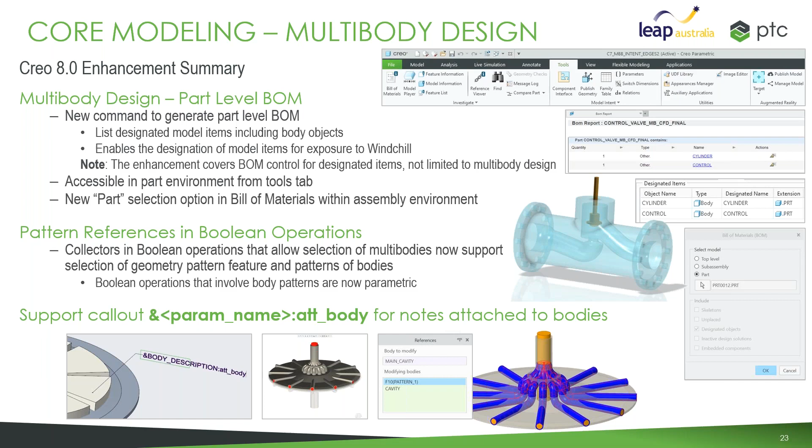Last one is around support callouts. So if you have some defined annotations, if you're doing MBD related stuff, or you want to put them in the model to use with the drawing, we can now create these callouts that can call parameters that are defined inside the body for your notes.

Sheet metal. I know there's plenty of you who do a lot of sheet metal stuff. So again, there have been lots of things through the Creo releases. In Creo 8, there's a few nice little things there. So there's now the multi-flat wall feature. So I can just go and pick as many references as I like as I build that flat wall. So it'll automatically handle inner and outer corner definition, miter, do the cuts, whatever else I want.

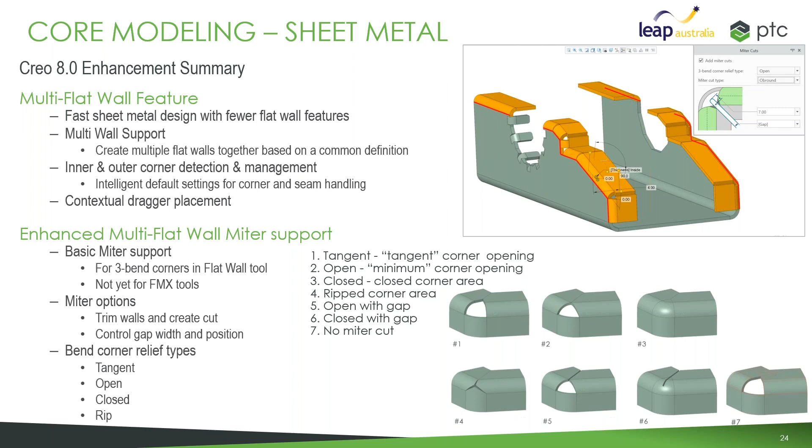In terms of that mitering, I've got a whole bunch of options I can see here on the screen in terms of how I handle that geometry, what I want to do in terms of the corner, miter cuts and the like. We'll have a look at this in the demonstration. And a few other bits around other things like corner detection, handling bend relief for your flushed hems. Lightweight hole support is there inside sheet metal. The multi-hole is there inside sheet metal as well.

The last one there, because I know a lot of customers used this when it was introduced back in, I think, Creo 4, the flat simplified representation for your flat instance. So the ability to automatically create that as a simplified rep rather than as an instance, which would then be something else you might need to manage in Windchill. So you've now got a configuration option where you can define the default name for that flat simplified rep. So if you have a particular convention that you use, you can define that in your config and have your flat pattern reps automatically use that naming convention.

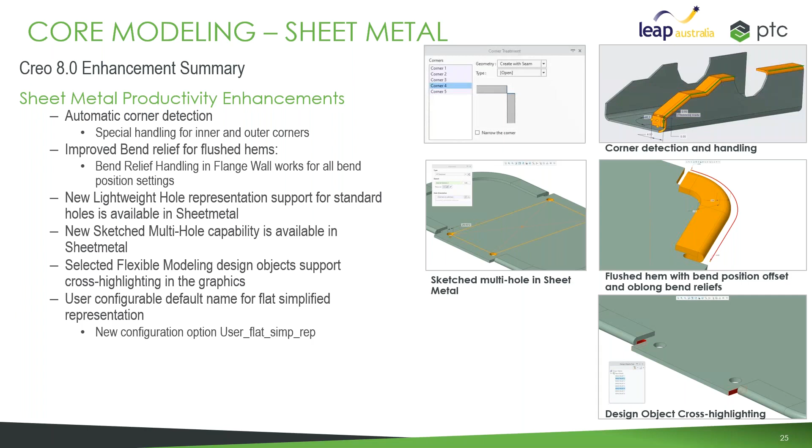All right, the welding tool in Creo. Okay, so again, we've got quite a few customers who are using this. So the weld dashboard got a big overhaul along with all of the other areas, grouping them together, basically making them match all of the tools that are there. A whole bunch of new icons there for things like groove and butt welds, having images that show that rather than just text to help explain it. So you've got all of your labels and everything there in the dashboard.

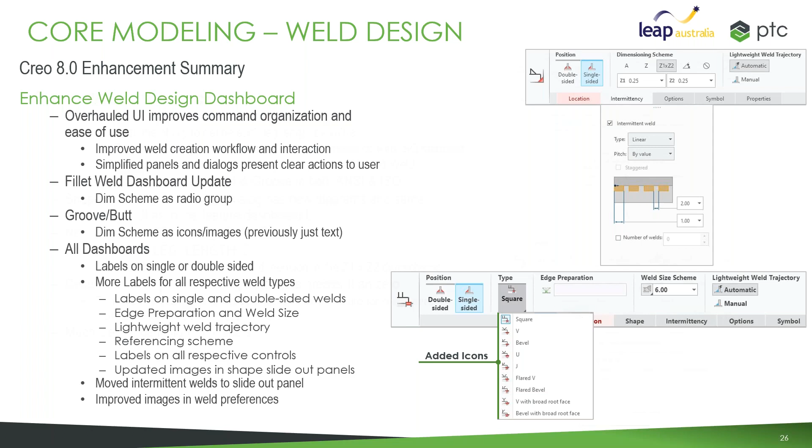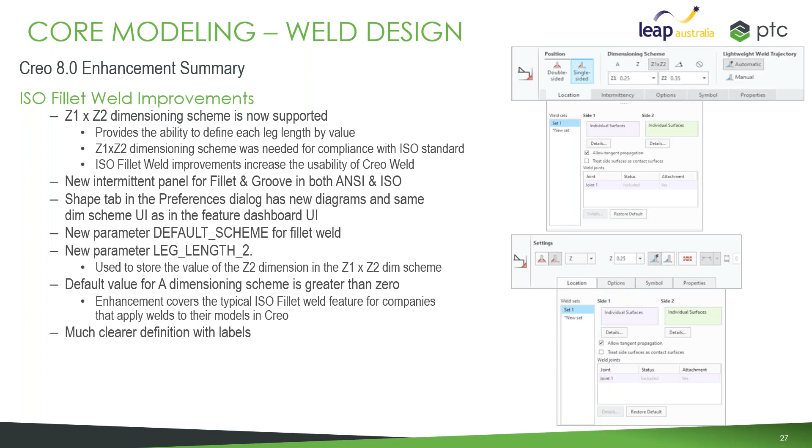Some more improvements around ISO fillet welds. Okay, so additional dimensioning schemes are now supported. Some more options for your intermittent welding for both ANSI and ISO standards. A bunch of options there for dimensioning schemes and working with your labels. Again with the intermittent weld, some new options about that. There's a new panel that helps control that, and some more information around capturing those parameters.

And also on the side, the weld preferences, when you're working with your weld preferences in your dialog box, this was a little documentation thing where the picture in the preferences dialog box didn't match the pictures in the dashboard. So they've now made sure that they match up and they're consistent.

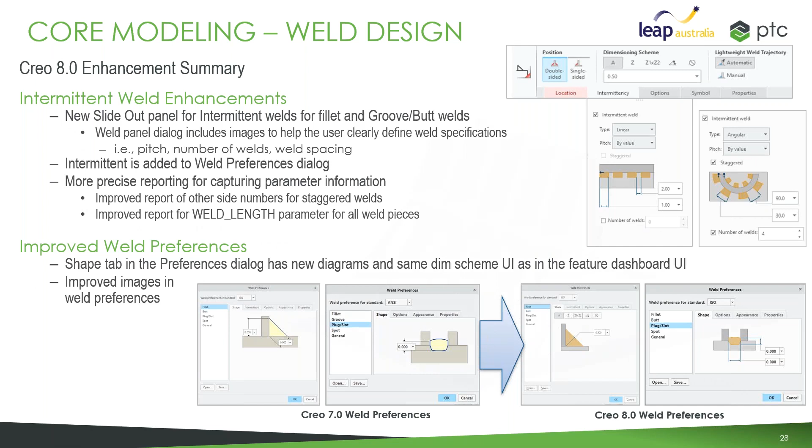And lastly, if you're doing welding with MBD, model-based definition, now we've got semantic reference control for weld symbols. So the idea is that when you've got your weld symbol, now we can basically add in all of our semantic, so our surface references. So then when we pick on the MBD annotation, we can see all of those references that weld is highlighting or relevant to.

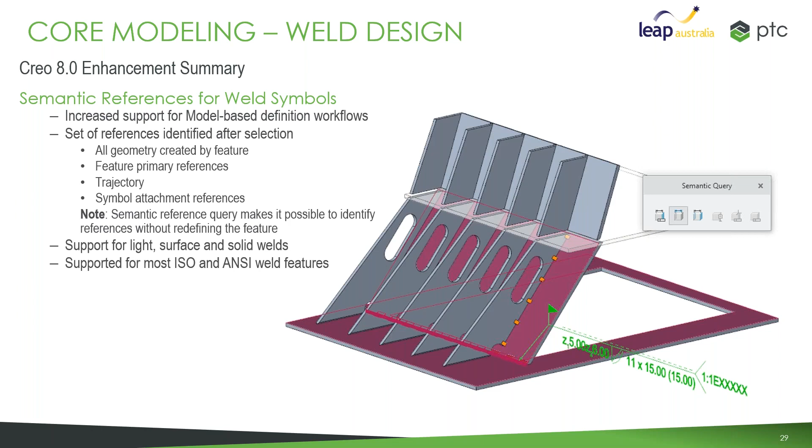All right, the warp feature. So one of our favorites was introduced way back in the Wildfire days, the ability to sort of globally deform geometry. Okay, so still there. We've got customers who are still using it for certain clever, tricky things, twists and bends and stuff like that. Helps with these sort of weird manufacturing processes that are difficult to model. So the warp feature again has been overhauled to match up with all the dashboard layouts.

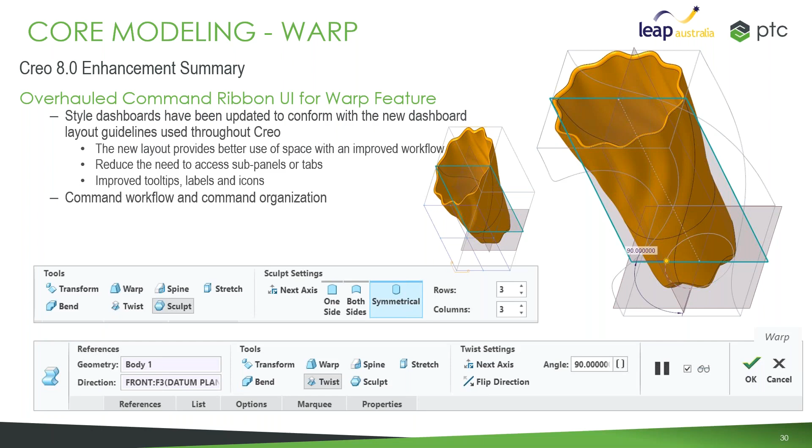So you import that STEP file in, and it's an assembly, so you get an entire assembly structure inside your Creo model which represents that motor. Great, I can put that in there, do all of my stuff, have my BOM and everything else. But really, from a business perspective, I don't care about all of the bits inside that motor. The business object, all we care about is the motor itself, because that's what we purchase. We don't care about everything else inside.

So what I can do inside Creo now is say, let's make that assembly an inseparable assembly. What it does is it basically takes all of those components inside, the block, the bearing, everything else, and embeds them inside that assembly file. So if I bring in the STEP file, save it, make it inseparable and save it to disk, I've only got one .asm file stored on disk. That's all I'll see.

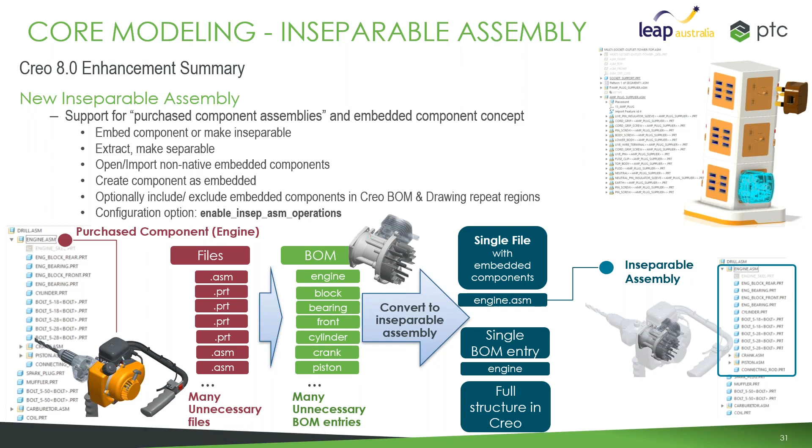So let's just check the engine in as an inseparable assembly. And I've only got one Windchill part to worry about, one assembly file to worry about, nothing else, okay? That's still all supported there with repeat regions. Everything else is all there, but I can now make that inseparable. So I can basically take an existing assembly, I can convert that to inseparable, okay? So just by right click on that, I can convert it.

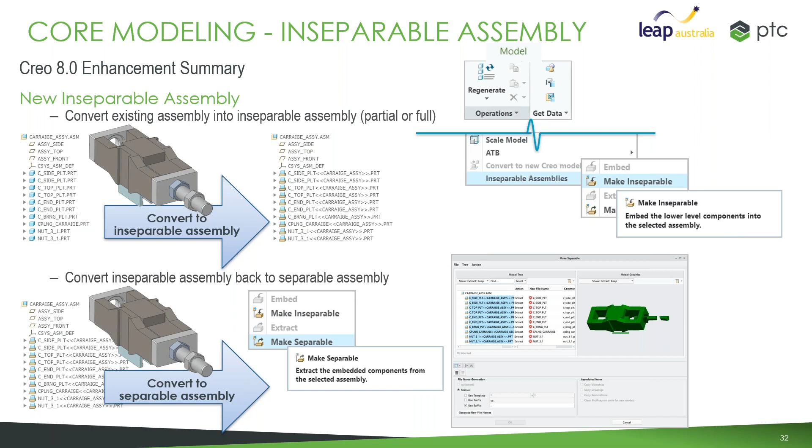I can also, if I really want to, take an inseparable assembly and convert it back. Okay, so that is an option if you need to do that for whatever reason. So you get essentially like the old save as dialog box off an assembly, choose all the names of what you do. So you do get a warning dialog box that pops up when you do this. It gives you a little bit of stuff around reference handling and things like that.

There's stuff like if you've gone and created drawings of those individual components and chosen references off that, those dimensions might turn purple depending on what you have. There's a few other things like if you make it inseparable, it's not supported by the tolerance analysis or the GD&T Advisor tools, which we'll talk about in a little bit.

Okay, so there are some impacts to working with inseparable, but as I said, from the examples I've seen over the years talking to people, it's really that sort of I'm dealing with imported data. I've been given a STEP file for something. It could be maybe like a PCB, it could be a motor, things like that, that I don't really care about all of the bits inside it, but that's what I've been given. I get this structure, which is great for visualization and everything else, but I just want to deal with that one assembly. So this is really what inseparable assemblies are all about.

Another good use case for this, because I know some of you here today actually are working with motion skeletons. Okay, so a motion skeleton is a special skeleton that you can use for top-down design that has multiple components inside it with all of your mechanism connections. So you could just have like a bunch of curves and planes and sketches to really help you map out the complex motion of your design and then use those to drive the build of the geometry.

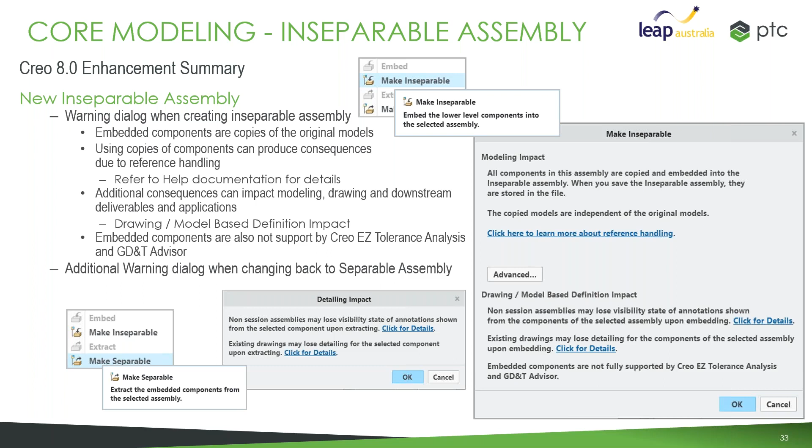So again, when you create a motion skeleton, it's like a special kind of assembly with all the bits that move relative to each other. So you can actually turn that motion skeleton into an inseparable assembly. It still understands all of the pin connections, so it'll still work as a mechanism, but you've only got the one motion skeleton assembly to deal with now, not all the individual parts inside that. Okay, another example of inseparable assemblies.

Okay, so there's also the ability, as you're creating brand new parts, to create a brand new part as an embedded component inside an assembly. So maybe up front you design something that you know you don't actually want to be separated out, so you can define it as an inseparable part when you're doing that.

Okay. The other thing as well, from the data exchange side of things through Unite, if those tools have something that's equivalent to this, then Creo will understand that and maintain that relationship. So like the example of the SOLIDWORKS virtual assemblies, similar sort of thing.